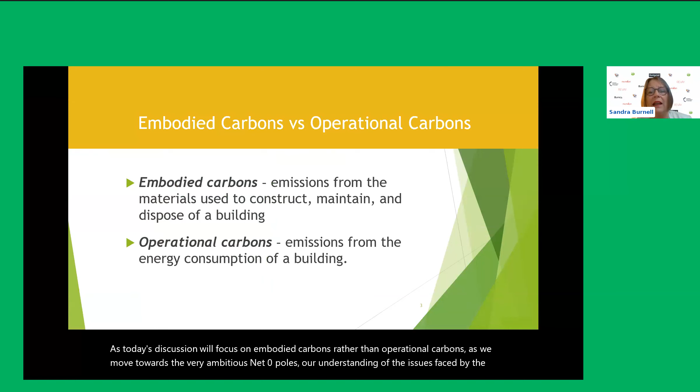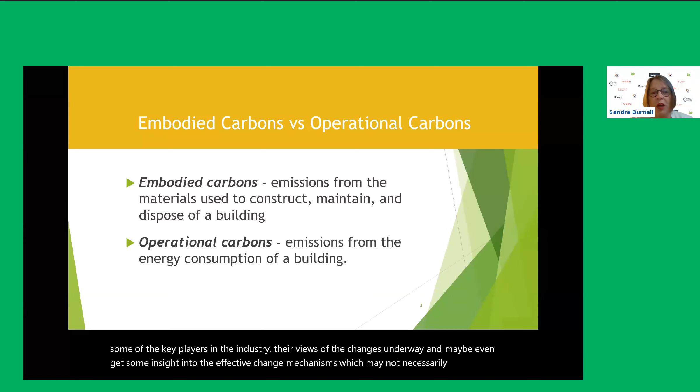Today's discussion will focus on embodied carbon rather than operational carbon. As we move towards the very ambitious net zero goal, our understanding of the issues faced by the construction industry at large continues to expand. Today's panelists will start by each providing a brief snapshot of their role in the movement towards reduced embodied emissions. We know that things need to change, but we're still not quite sure what all these things are. It's our hope that by the end of today's presentation, you'll have a better understanding of some of the key players in the industry, their views of the changes underway, and maybe even get some insight into effective change mechanisms, which may not necessarily result in additional project costs if managed effectively from the outset.

Our first speaker is Kailey Sutton from McMillan. She practices in infrastructure, municipal, and land use planning law, advising on the development of projects, bylaw and regulatory compliance issues, and building code matters. She also obtains front-end approvals and permitting, as well as drafting and negotiating complex agreements.

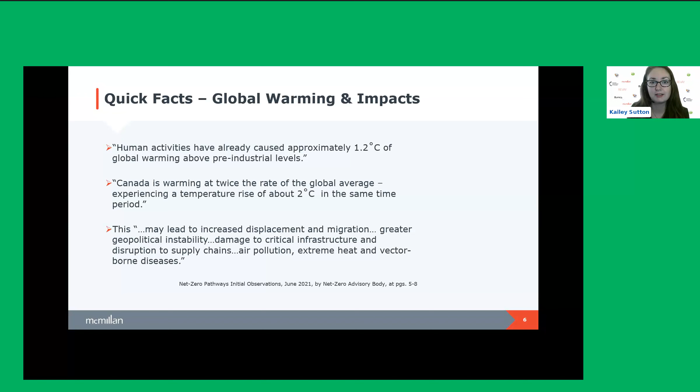Human activities have already caused a 1.2 degree change of global warming above pre-industrial levels. Canada is warming at twice the rate of the global average, and this might lead to increased displacement and migration, greater geopolitical instability, damage to critical infrastructure, and disruption to supply chains, air pollution, extreme heat, and vector-borne diseases. Two years ago, yeah, and I think we're seeing those supply chain issues, vector-borne diseases, air pollution, extreme heat - all of these things are happening and impacting everything, including the infrastructure and construction industry.

More facts, Canada-based: Canada's overall emissions growth over the 1990 to 2021 period was driven by increased emissions from oil and gas, as well as the transport sector. The decrease experienced in some of this was due to the electricity and heavy industry sectors - so either better electrification or change in those industry sectors.

Canada's homes and buildings account for 13% of national GHG emissions, so we have something to do with this. But okay, we've identified some foundational issues.

One of the other early issues a lot of us are experiencing right now is inconsistency with definitions when we're talking about greenhouse gases, net zero, and so on. There's also inconsistency with respect to formulas - are we talking targets? Are we talking legislation? So I thought I'd put up a few definitions to get us on the same page for this discussion. Net zero emissions is the anthropogenic, meaning human generated, emissions of greenhouse gases into the atmosphere, where they're being balanced by anthropogenic removals of greenhouse gases from the atmosphere over a specific period.

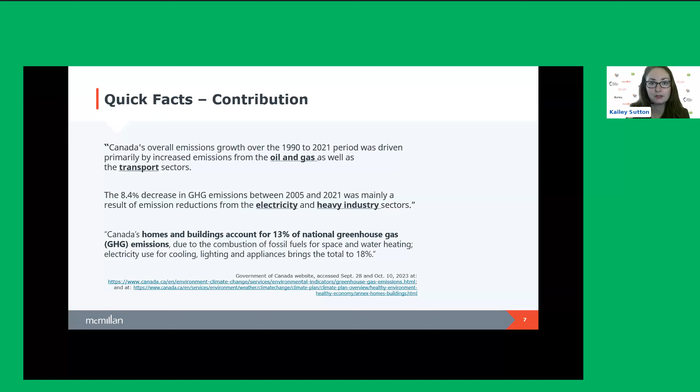So we're at a net of zero. And greenhouse gases - you know, I noticed that there's different definitions of what that can include too. Typically these are the greenhouse gases people are referring to: carbon dioxide, methane, nitrous oxide, and so on. So net zero doesn't mean no emissions, it means we're balancing them out. Unsurprisingly, there's inconsistency among definitions and formulas.

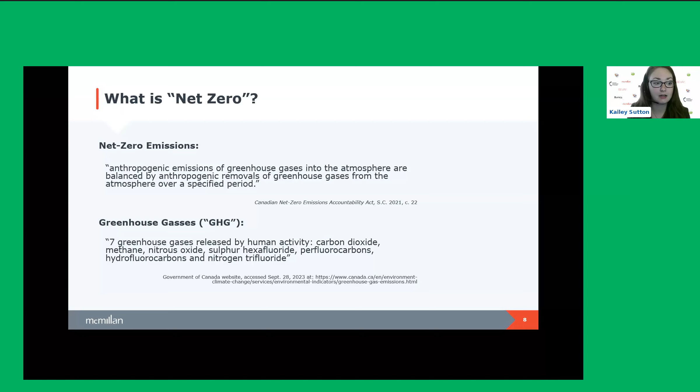Sandra, if we can go to the next slide please. All right, so we have these high level issues. But as I mentioned, this is a big conversation, and where to start with the regulatory regime...

It's a multi-dimensional question, and of course, as the lawyer, I'm saying, well, it depends. And what does it depend on? Well, a number of factors. Which regime applies to you? What are the rules? Well, it depends. What level of government are we talking about - federal, municipal, provincial?

What's the geographic region that you're located in? Because as we'll discuss later on, depending on what province you're in, depending on the nature of your project, it can change by your region. What type of infrastructure are we talking about? Infrastructure is not just one type of construction - we have transit, we have buildings, we have utilities.

The stage and process - are we considering how to construct? Are we deconstructing something? Are we talking about operating and maintaining? The level of formality - are we thinking it's an industry objective, or are we talking about a piece of legislation that I will be non-compliant with if I don't do these things? Also, what parties are involved - is this a procurement between a government body and a private party, or is this simply between two private parties?

So it is a big question and a big conversation, and I can't get through all of it today, but I will try and touch on some of these so you have an idea. Next slide please, Sandra.

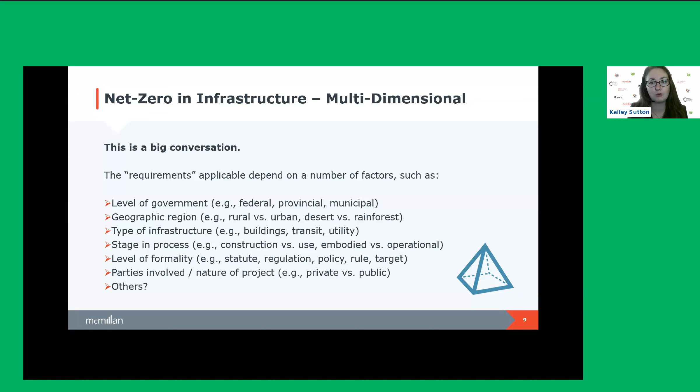So for example, depending on the stage of the process, as I mentioned and Sandra touched on this a bit when we were starting, embodied carbon would be carbon emissions associated with materials and construction processes throughout the whole life cycle of that building or infrastructure. Whereas operational carbon is the emissions associated with energy used to operate the building or in the operation of infrastructure. And then end of life carbon - these are the emissions associated with deconstruction, demolition, transport from site, waste processing, disposal phases, and so on. These are only some of the types of sources of carbon.

Thinking of others - what type of transit or transportation are you using to get your goods? Are we shipping? Are we using rail? Are we using vehicle-based transport? So it depends on what we're using to get you to your site. A lot of factors coming in here.

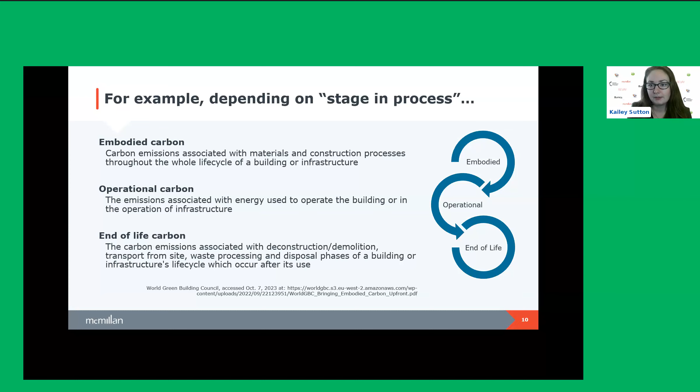For example, like I said, if we're talking about procurement between two private parties, the rules will be different than if it's between a government body and a private party. So let's look at this from the federal perspective first. Sandra, slides please.

So let's go high level again. As you are all probably aware, Canada is a signatory to the Paris Agreement, an international treaty on climate change, adopted by 196 parties at the UN Climate Change Conference in 2015.

Canada went one step further with a number of other countries and made a commitment for a certain amount of reductions to net zero emissions by 2050. The federal government has therefore enacted certain legislation as of 2021 to this end. But note that legislation, being the Canadian Net Zero Emissions Accountability Act, really only puts in place requirements for the ministers, so for the government itself to comply with, largely being monitoring and reporting.

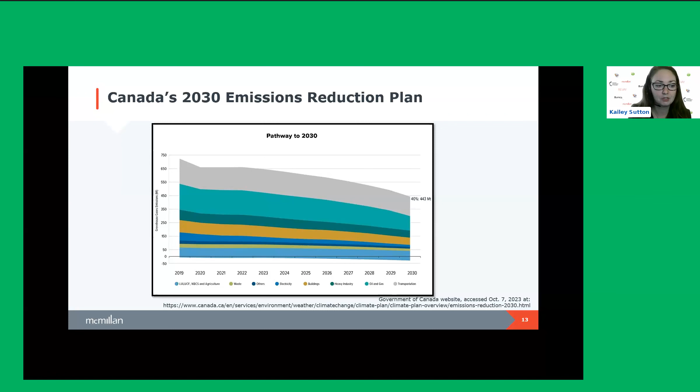So, for example, like the Canada Greener Homes Loan Program, additional investment, expanding the low carbon economy fund, additional funding for zero emission vehicles, and working with provinces and utilities to establish a pan-Canadian grid council. So it's all part of the government's plan. Good. Next slide, please.

Some of you may know, however, legislative powers in Canada are divided between federal and provincial, where the federal is generally in charge of environmental matters. The province is generally in charge of civil and land use matters, including construction and design. So most of these policies and regulations are going to come in here as impacting most people, I imagine, on this call.

And so the feds have, however, brought in a net zero energy ready model that was proposed in 2018 by the government. It's evolved since, and it's become part of this National Energy Code of Canada for buildings. So this was developed as part of a commitment for improving energy efficiency of Canadian buildings, and it applies to large buildings and sets out technical requirements.

But as I mentioned, this is the province's purview. So the federal government has had a goal of having the provinces adopt this. The provinces largely, in some way or another, have adopted some or all of this building code, and they've entered into a harmonization agreement so that between provinces, we're starting to have similar requirements. Ontario's adoption of the NECB is through amendments to our Ontario Building Code. And so if you are building in Ontario, you're going to be subject to the Ontario Building Code, subject to a few exceptions. And so the building code...

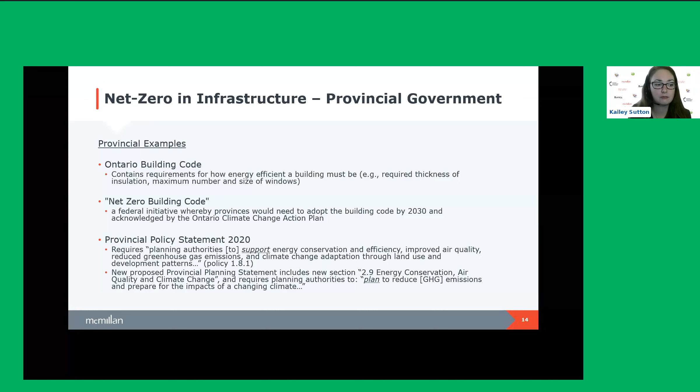Sandra, next slide, please. The province, however, delegates a number of its building code matters to municipalities.

And so you'll likely run into a lot of this at the municipal stage. You'll be aware that if you're building, you're required to meet a number of items considered applicable law under the Building Code Act to obtain building permits. One of those is, for example, site plan approval. Site plan approval doesn't apply to all jurisdictions in Ontario, but where it does apply, you'll be subject to approval conditions that need to be met.

Those approval conditions generally need to align with the planning instruments above it, including zoning bylaw, official plan, and PPS. And so this is how the province's mandates start to come down into what the municipality is regulating.

In addition, municipalities have been putting in place their own standards. So there's the Toronto Green Standard, for example, that many might be aware of. It's currently on version 4. And as they've said on their own website, it is a critical tool in implementing their official plan policies.

Mississauga, for example, has the Green Development Standards, which is currently being updated, and I know it's open for industry consultation. And Ottawa, for example, has the High Performance Development Standards, and it notes on its website that it's a collection of voluntary and required standards that raise the performance.

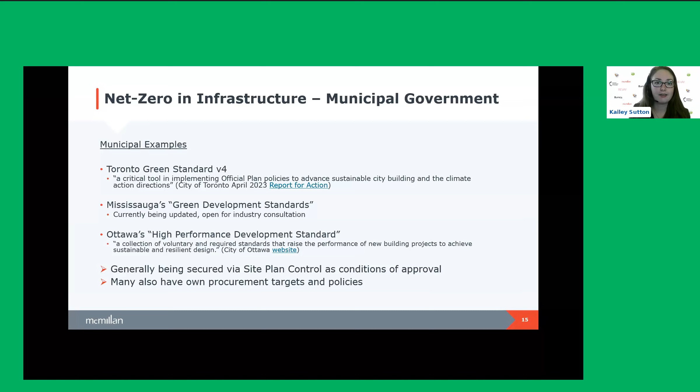I do note, like the federal government, the province and many municipalities also have their own procurement policies. So if you're entering into an agreement with the municipality, you'll likely be subject to additional standards and policies. But again, that's something that they as owner are enforcing, not necessarily because it's law.

Next slide please, Sandra. My last slide, but I wanted to highlight some of these challenges, as I think you may have pulled out yourselves through what I was saying. What I started with: there's inconsistent definitions, targets, standards, means of measurement, and so on. And so the industry, I think, is trying to come together to align, because without consistency even in our starting definitions, how do we know how and when we get to these end targets?

Many of the requirements apply to public procurement only as actual legal requirements. And even then, not necessarily law. So what are we doing that is in place that can actually enforce some of these requirements?

Many are limited in scope. So the Standard on Embodied Carbon in Construction currently only covers ready mix concrete. So we need to figure out ways to expand this and make it apply more broadly.

And most include reporting requirements, but not penalties for missing a target. For example, the Canadian Net Zero Emissions Accountability Act even says that the instruments included in that act are actually not statutory instruments. So again, they're more like guidelines.

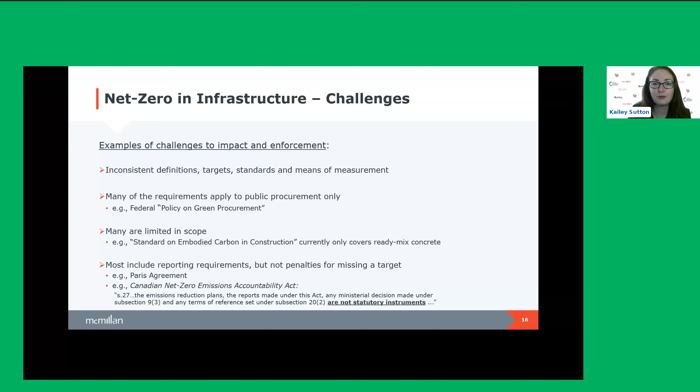So not to end on some note of concern, but more so to say, at the moment we've got a lot going on in terms of regulatory regime. I think the industry needs, and is doing a really good job of trying to learn more about it, and we've got some challenges to overcome. Thank you to the TCA for hosting this session to try to help us overcome some of these challenges. So I will end on this note and look forward to hearing my co-panelists speak about the technical parts related to this industry. Please reach out to me if you have any lingering questions or would like to discuss what might be applicable to your project.

Thank you, Kailey. Definitely a lot to take in here. And most importantly now, we know who to contact when we start digging into all these regulatory requirements.

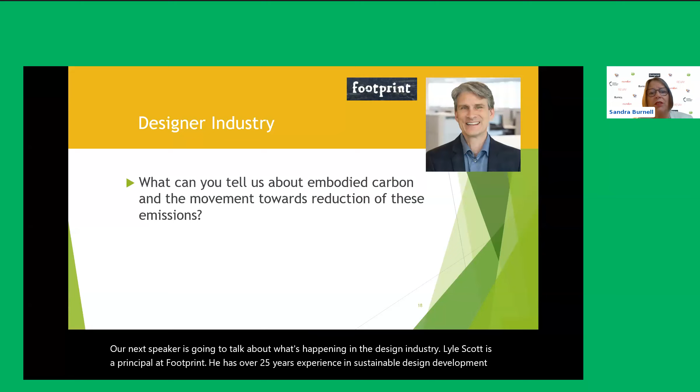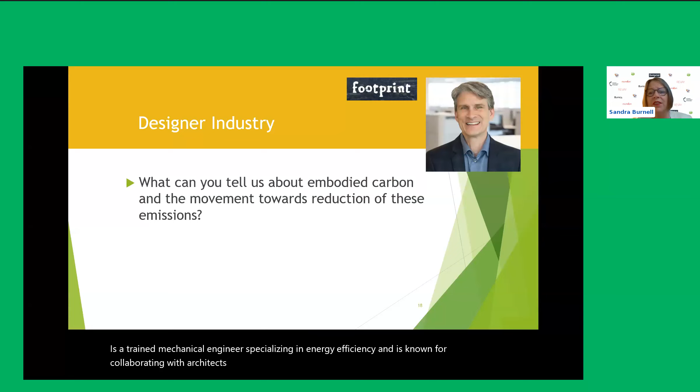Our next speaker is going to talk about what's happening in the design industry. Lyle Scott is a principal at Footprint. He has over 25 years experience in sustainable design, development, and operations. He's a trained mechanical engineer specializing in energy efficiency, and is known for collaborating with architects, engineers, and developers to create the most appropriate sustainability solution.

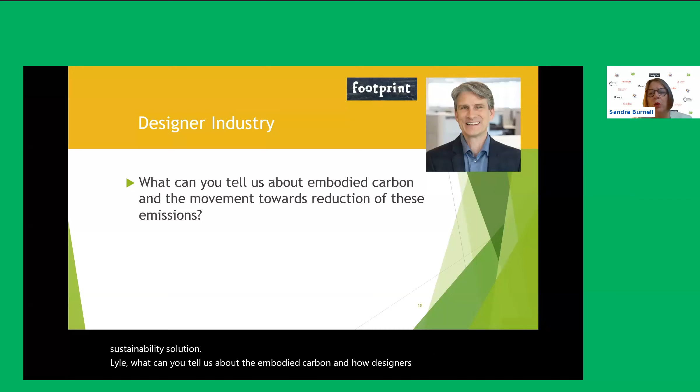Lyle, what can you tell us about embodied carbon and how designers are moving towards the reduction of these emissions?

Well, one of the interesting places to start is that I'd say there aren't many in the industry who really understand what embodied carbon is. It's a term that's new to most of us, and due to the regulatory changes we're seeing, I feel that a lot of us are going to need to become experts in it quickly.

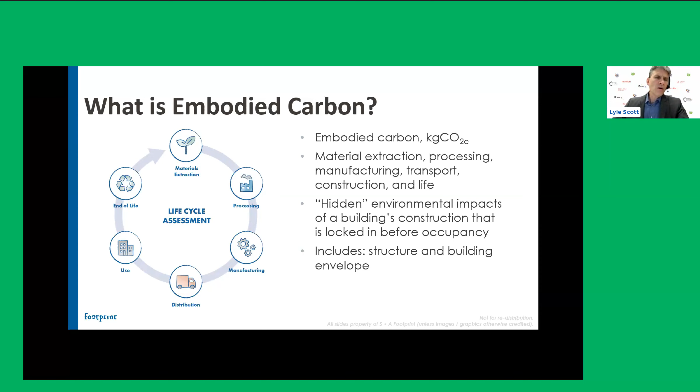Each stage along the way has some embodied emissions. We're using equipment that's burning natural gas or diesel fuel or other fuels that are having an impact on our planet. So on to the next slide, you'll see an interesting little pie chart.

I've been involved in this industry for literally decades, and we've always focused on what happens with operations - our gas bill, our electricity bill - and we've focused on reducing the energy associated with operations of the building, our heating and cooling and lighting, etc. And we kind of haven't even thought about the energy that's involved in building materials and construction.

There are different stats, but when we actually take a look at it, it's a big deal. And up until this point, all of our efforts have really been focused on making our buildings more energy efficient without looking at the impact on the materials we're selecting to go into our building.

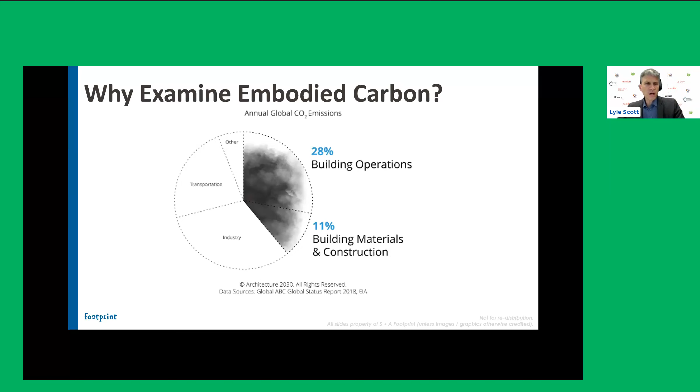So on to the next slide. As we make our buildings more and more efficient, it's actually projected that the embodied carbon impacts of a construction project will basically be equal to the operational impact of that building over the 60-year life of that building.

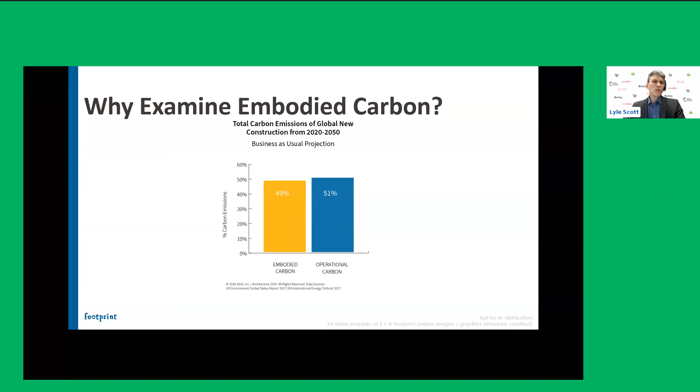So what do we do? On to the next slide - we'll do something which we call a life cycle assessment. A life cycle assessment quantifies the embodied carbon of a particular design, and predicts what that embodied carbon is going to be over the life of the building. It looks at the different stages: the product stage, the construction phase, the use stage, and the end of life stage.

This is something that's most useful, I think, at the early design stages when you have a lot of different design options on the table, when you're considering different materials, different potentially massing or other options that you may have at the earlier stages. As you get further into the design, you could start to refine some of your design decisions, and this life cycle assessment will get a little more accurate.

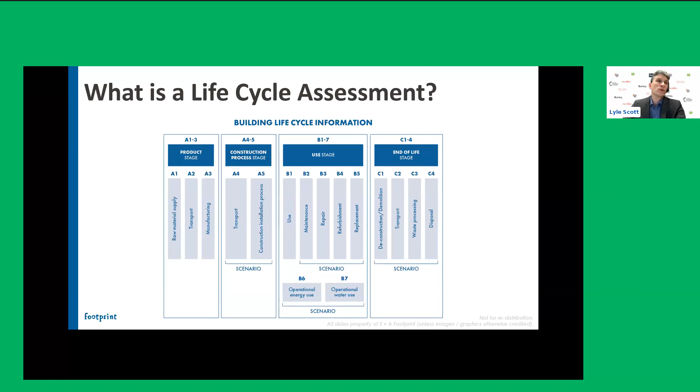On to the next slide. Life cycle assessments have only really been commonly discussed in our industry since LEED version 4 came out. That was a handful of years ago. And it's been, I'd say, niche - there's been a limited level of knowledge. That level of knowledge has increased with the release of the Canada Green Building Council Zero Carbon Building Standard.

Both of these standards are voluntary, so it really is up to those who want to be known as an industry leader in sustainability to latch onto one of these standards - that's most common. There are other standards out there, but these are voluntary options. On to the next slide.

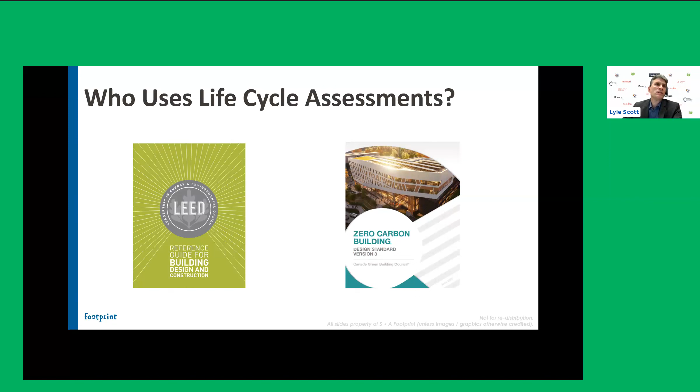Kailey mentioned that the Toronto Green Standard is looking at embodied carbon, and they came out with some research. This research was done by the Toronto Atmospheric Fund, a study done with the University of Toronto. They analyzed a bunch of buildings - on the left we have Part 9 residential buildings, single-family homes; large residential buildings in the next column; and then commercial buildings and other building types in the last column.

Really what it's showing is how the best building performed - a lower number here is best, a higher number is more embodied carbon. It's showing how the best buildings performed and how the worst buildings performed, and the average is the little square in the middle. So the average embodied carbon was 191 for a small single-family home, and 435 for a large multi-residential building - that's kilograms of CO2 equivalent emissions per square meter. On to the next slide.

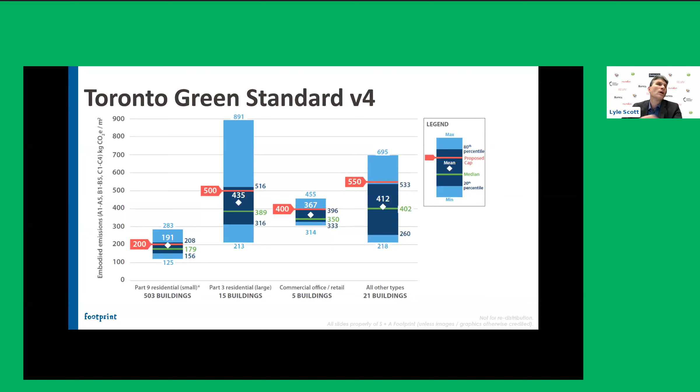Earlier this year, City Council approved a change to the Toronto Green Standard. It changed the Tier 2 and above embodied carbon requirements. The Toronto Green Standard Tier 1 is mandatory, while Tier 2 and Tier 3 are voluntary. So the city did not make any changes at this point in time that impact mandatory requirements.

They impacted voluntary requirements, setting a target of 250 kilograms of equivalent CO2 per square meter for a single family home. That's about 24% worse than the average in that University of Toronto study. They set a target of 350 for high-rise multi-residential and non-residential, which is 24% better than the average in that U of T study.

They set a Tier 3 requirement for mid-rise and high-rise residential of 250. That's 74% better than the average building in that U of T study.

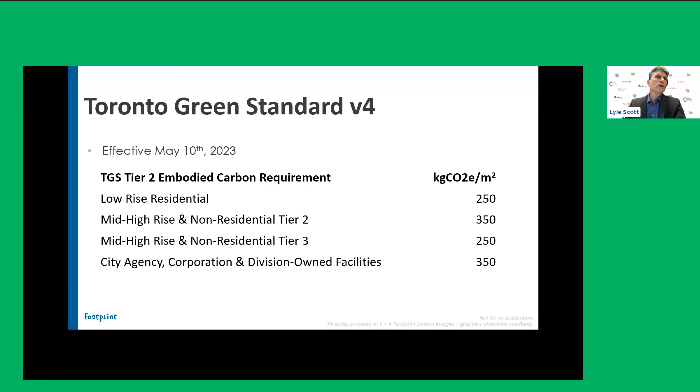On to the next slide. These are all voluntary requirements, right? They're Tier 2 and Tier 3. So why does it matter? Well, the Toronto Green Standard, one of the things they did was in 2017 there was a real change to version 3, and what they did back then is they said, here's what's going to happen for the next versions of the Toronto Green Standard.

We're telling you that the Tier 2 is going to become Tier 1 in the next version, and they've given us the dates for this. Our current version is version 4, in place since 2022. There's going to be a new version in 2025 and a new version in 2028. It is anticipated that the version 4 Tier 2 voluntary requirements in place right now will become mandatory in 2025, and similarly the Tier 3 version 4 current requirements will become mandatory in 2028.

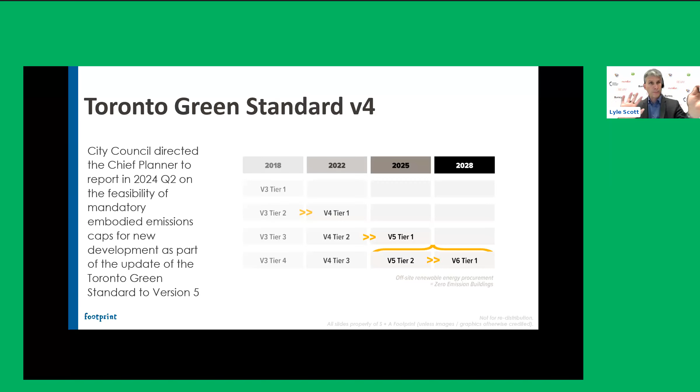That's my speculation, but it's backed up by a statement that came out in that same city council ruling that happened on May 10th of 2023. City council directed the chief planner to report in Q2 of 2024 on the feasibility of mandatory embodied emission caps for new development as part of the update to the Toronto Green Standard to version 5. So what I'm saying is that's notice that effective June 1st, 2025, we can anticipate mandatory targets in the city of Toronto. It's not ruled on yet, but that's the guidance we're getting. On to the next slide.

You're going to see the same thing happening in many, many municipalities. This, for example, is the draft Mississauga Green Development Standards. The targets are very similar, again with Tier 2 and Tier 3, though their years are slightly different. They're suggesting Tier 2 will have a mandatory target in 2027 and increase it again in 2030. We also understand that the National Energy Code for Buildings is going to have a 2025 date for embodied carbon. Again, it's a national energy code, so it'll only become relevant when it's adopted by the provinces into the Ontario Building Code and other provincial codes.

On to the next slide. Lots we could do. Most important thing is, as an industry, we have to start educating ourselves now. We can't wait, we really cannot wait. There are a lot of things, and not all of them increase cost. One of the big things I've seen is a reduction of below grade structure, which can significantly reduce costs, with obvious impacts on parking and other things. There are material substitutions we can make, but most importantly, I think innovation will be necessary, and you will need to start working with your suppliers and talking to them about embodied carbon.

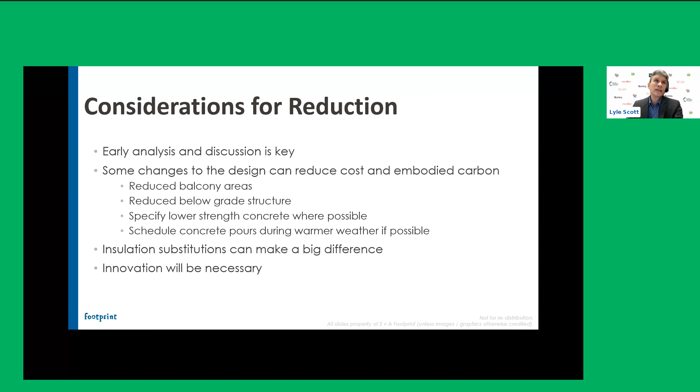Next slide, big way to close. So many of us are still thinking, oh, we're going to do what we did last year or the year before, just updating it. We really, really, really have to take a different approach.

I have not seen the industry change at such a rapid pace at any point in my career as what's happening now. Sandra, back to you.

Thank you, Lyle, that was fabulous. What we're leading into, I think, is the most important thing: making people aware. We've got to know what's coming, and we need to know what everybody's doing out there and how we can fit into it or take advantage of all the learning that's taking place.

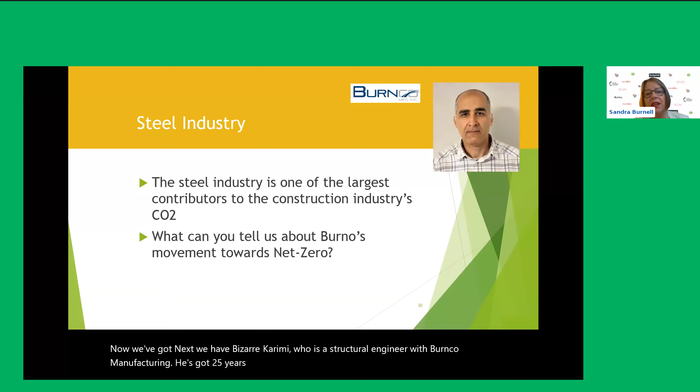Now next we have Behzad Karimi, who is a structural engineer with Burno Manufacturing. He's got 25 years experience in the steel industry. He has his master's degree in structures and is a structural engineer and project manager with Burno Manufacturing.

Recognizing that steel and cement account for 14% of global CO2 emissions, and 47% of the construction industry's emissions, steel manufacturers and installers have the largest opportunity for improvement. Can you tell us how Burno is moving forward towards the reduction of carbon emissions? Sure.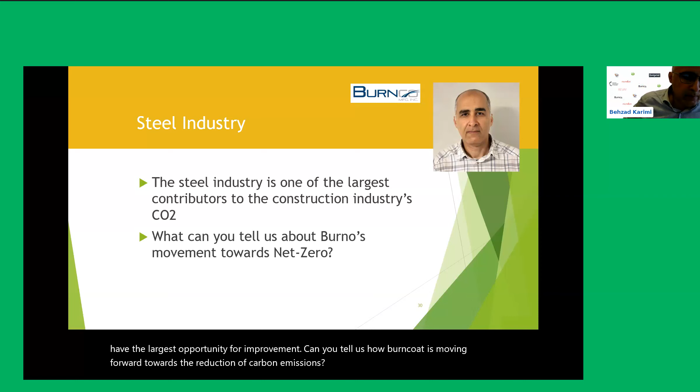As you know, the Government of Canada has implemented a standard on embodied carbon in construction. Currently, steel construction product is not included in that standard. A steel product should be considered as mill products or final product used in construction.

Steel manufacturing produces more CO2 than any other heavy industry, comprising around 8% of total global emissions. Efforts are in place to move steel production away from coal-fired furnaces to ones powered by electricity or hydrogen. The steel supply chain has potential to reduce emissions by replacing fossil fuels with low or no carbon options, switching to renewable electricity, electrifying vehicle fleets, and increasing the usage of recycled material.

When I'm talking about fleet, imagine we have a project like 5,000 tons of steel. Imagine transportation for this steel from mill to final product - how much fuel has to be consumed for just this one project. We have a couple of these projects in our facility, and the steel industry is a big industry in Canada and the US, so you can imagine how they scale up the steel.

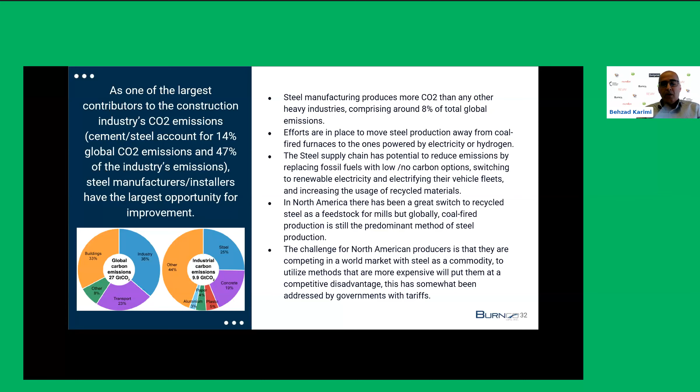Next slide, please. So, how are steel manufacturers currently expanding and planning for the future? There are a couple of aspects.

One of the major ones is design. Many sophisticated 3D design softwares have been developed which assist to optimize the structural design, leading to less steel than previous software or manual design methods. Less steel, less CO2 emission.

Welding fumes are one of the origins of CO2 in the steel industry. Optimizing the joint design to use less welding size, or the minimum possible welding joint, is one of the solutions to reduce CO2 emissions.

This is something we implemented in our plant here. Steel is a recyclable material, so there is the ability to reuse the material multiple times. This is one of the big advantages of steel, if we can think about reusing steel in our future projects. Next slide, please.

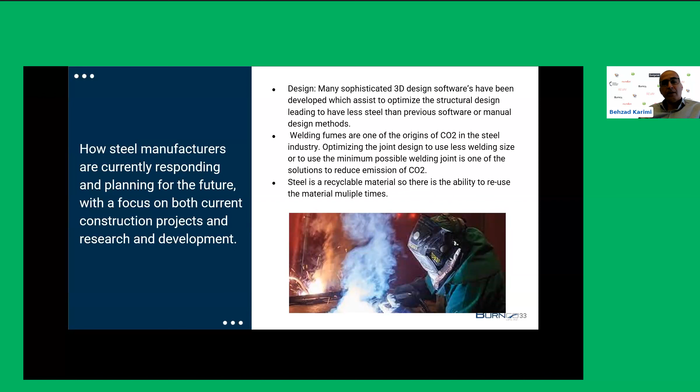So, use low carbon steel. These days, the use of low carbon steels has increased compared to the past. That's good news for the steel industry and for reducing CO2 from steel.

Purchase the steel from local mills, like USA or Canada, because as I explained, transportation for steel is a big item contributing to CO2 emissions. So if we reduce the transportation, we reduce carbon being transferred everywhere.

Burnco and its parent company have been developing robotic welding machines to replace traditional welding machines, as well as automated plasma cutting, which reduces production time and waste in the welding process. We also concentrate on local projects to avoid long transportation of finished steel products to the site, so currently we're focusing on more local projects in Ontario rather than projects in Alberta or eastern Canada.

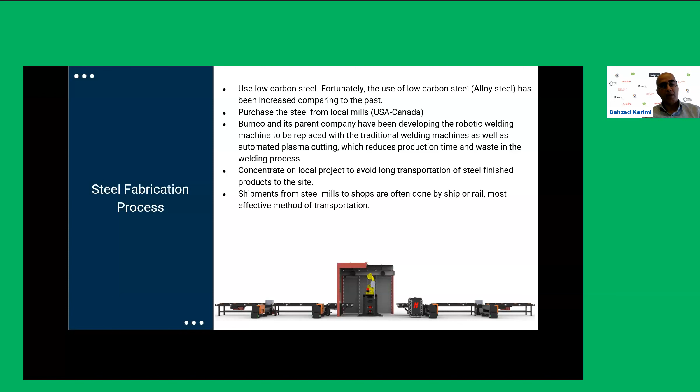In our fabrication process, we're utilizing modern nesting software, which minimizes the scrap weight of the steel in the project. We utilize mill steel at mill length and optimize the software to maximize yield and minimize scrap, so when we have a project, we try to have the steel in a size which has less scrap. Previously we had about 5 to 6% scrap on the steel. Right now, with these measures, we try to reach 1% scrap.

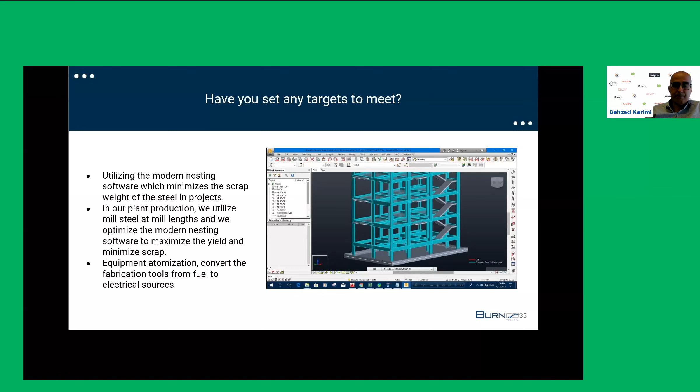Equipment automation and converting the fabrication tools from fuel to electrical sources is one of the measures we're doing in our plants.

So what are the biggest hurdles faced by the steel industry? That's an important question. Producing green steel is an expensive process, and the industry needs to scale up rapidly to hit net zero targets. Today, 75% of the steel worldwide is still largely made in coal-fired blast furnaces. North American and European mills are generally converting to scrap and electrical furnaces at high cost. At the mill level, these technologies are expensive and can be cost prohibitive, making mills less competitive than those from other jurisdictions. It's a difficult balance for mills to scale up to hit net zero targets while remaining competitive in the market.

At the manufacturing or fabrication level, we are in a competitive bid. To be successful, we must source the cheapest available steel. On larger projects, fortunately, there are North American provisions to give local mills an advantage, but more of this is needed at the government or provincial level. There have been successful trade actions against dumping from jurisdictions such as China and other countries for mill steel and fabricated steel. We need more of these actions.

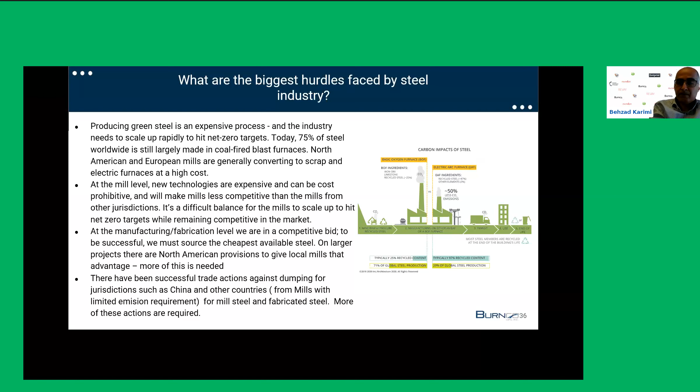What help do we need? Steel has a large role to play in lowering future emissions because of its ability to be recycled, and it is sustainable in the long run. Steel in the long term can be remediated, reinforced, and recoated to have a very long lifespan.

So we should have more steel in the design of the building, I'm talking about building with a steel design. Life expectancy and sustainability of steel compared to other materials in the infrastructure system need to be considered.

The steel manufacturer can achieve carbon neutrality if governments implement the right policies in the next five years. According to the International Energy Agency, in a new report, the IEA says economies need to recognize the use of interim technologies that substantially reduce emissions even if they aren't considered zero emissions. We don't need to say zero emissions since it's not mandatory now, but we have to have a plan, an interim plan, to reduce it substantially.

At the government level, more financial aid or incentive programs are necessary to upgrade the technology. And the last item is tariffs on dirty steel, blast furnaces versus electric arc production.

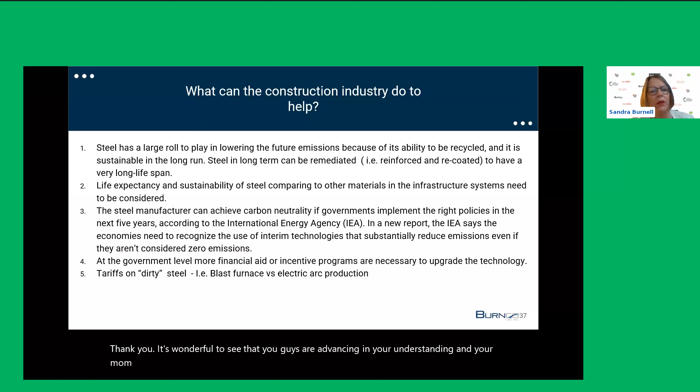It's wonderful to see that you guys are advancing in your understanding and your movement towards what we can do in this industry. Now, we'd also have a speaker here for the cement industry.

Sarah Petrevan is the Vice President of Sustainability for the Cement Association of Canada. She's the 2018 Clean 50 Emerging Leader Award recipient. With her expertise in industrial decarbonization, she advocates for policy change. She's testified before legislative committees and provides regular commentary for media. She also provides advice on topics such as carbon accounting, procurement, and the scale-up of clean technology.

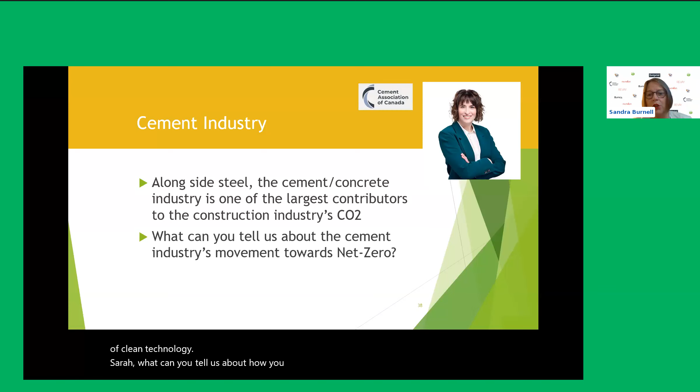Sarah, what can you tell us about how your industry is moving towards the reduction of carbon emissions? Sure, thanks Sandra. I really like how Kyle set up the conversation on embodied carbon in construction, but I think we have to think about concrete: what happens to it before it gets to a construction site? What's its carbon footprint and how do we lower it? This was something the Cement Association of Canada grappled with, along with many of our allies in the concrete industry.

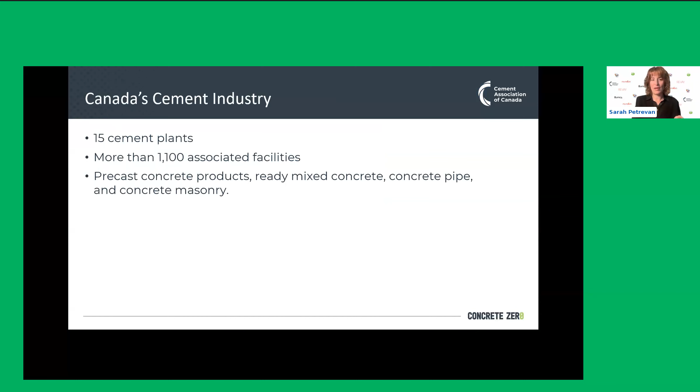Last May we created this action plan to net zero. Canada's cement industry is pretty vast. We have 15 cement plants across the country with more than 1,100 associated facilities, manufacturing everything from precast concrete products, ready mix, concrete pipe, concrete masonry, etc.

And so we developed ourselves our action plan to net zero. This outlines the steps that Canada's cement and concrete sector will take to achieve our net zero carbon goals. It featured contributions from members of the cement and concrete industry across the country, and we also had the report peer-reviewed by other allies in the industry.

Academics and environmental non-governmental organizations helped test some of our assumptions and the data we provided. We received a lot of feedback on the report, namely that this is one of the most transparent reports ever produced by a heavy industry association in Canada.

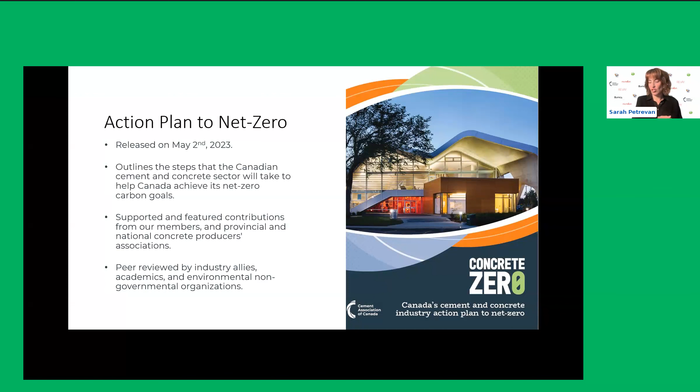Next slide. Maybe just a comment on the benchmarking data related to the federal government's embodied carbon in construction. The reason why ready-mix concrete is the only material covered is because, as far as I know, we're the only industry that has actually provided benchmarking data.

Because, of course, what is lower carbon concrete? Lower carbon compared to what? So it's always really important in regulatory approaches, in standards, in anything, that you have a baseline so that you know what lower actually means.

So let me talk a little bit about our targets. We modeled two different types of targets. We did one against a baseline of 2020 emissions, and in keeping with the Global Cement and Concrete Association's Concrete Future Net Zero report, we mirrored their 2020 baseline.

But we also looked at a business-as-usual scenario in which we planned for a modest increase in the use of concrete, because obviously we have to plan for market conditions, and it's not actually achieving net zero if you don't take market conditions into account.

Maybe one other quick point around our net zero action plan is that we really tried to get to true net zero, which means that we didn't account for purchasing of offsets, nor did we account for avoided emissions in our plan. So this is what we call a true net zero action plan.

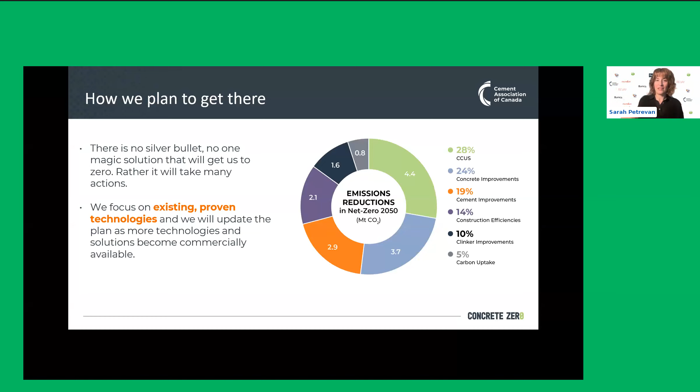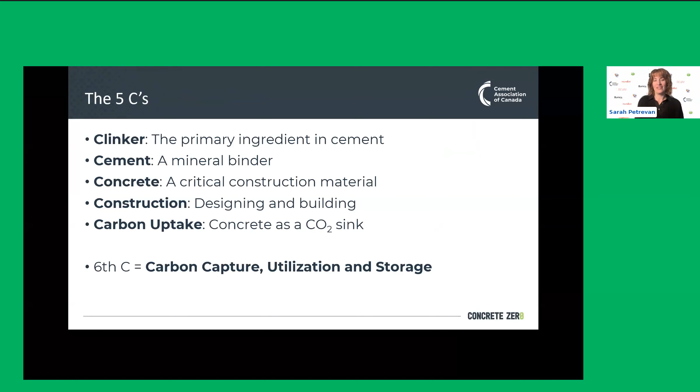And so we looked at what we call the 5 C's: clinker, cement, concrete, construction, carbon uptake. And then I always like to talk about this kind of sleeper 6th C, which is carbon capture, utilization, and storage. Next slide. So clinker, for those of you that may not know, this is the most GHG intensive component of cement.

But it is the key ingredient that gives cement its binding properties, and it is the kilning process. So it's not only the GHG emissions from the fuel source combustion, but also there are process emissions as a result of a chemical reaction. We call these emissions the chemical fact of life.

Our main emissions reductions in this area are about replacing fossil fuels that we use in the kilning process, substituting clinker—meaning we over time are able to lower the ratio of clinker used in cement through the use of something called supplementary cementitious materials—and, of course, deploying carbon capture along with either utilization or storage, depending on the jurisdiction you're in. We also acknowledge that thermal efficiency, decarbonated raw materials, and novel clinker chemistries are going to play a role in this in the future. We're just not sure what those are.

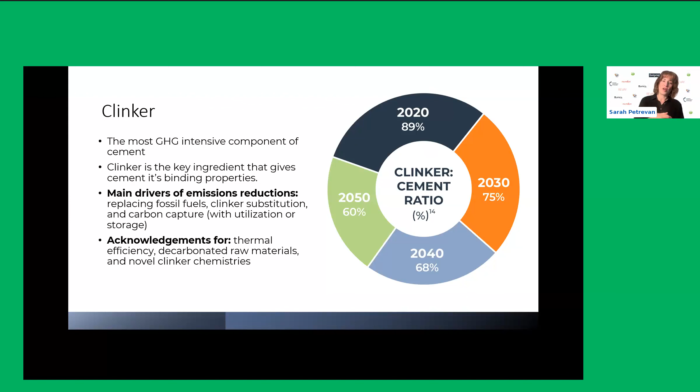Next. Then we go and we look at cement. Obviously the most energy intensive phase of the concrete value chain is at the cement plant, and so our main drivers of emissions reductions are really at looking at new and different cement blends.

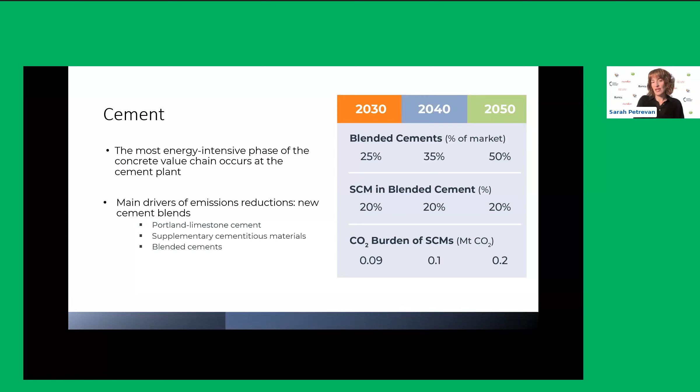So I talked about the increased use of supplementary cementitious materials, the shift—the 100% shift—to Portland limestone cement. Many of our members across the country have plants that don't produce anything but, and then of course the increasing emergence of blended cements. Next slide.

Concrete is the second most used material in the world after water. We like to say that a net zero future will both literally and figuratively rest on concrete because of its ubiquitous nature. It's also an incredibly climate resilient material and can support, in infrastructure for example, a reduction in operational carbon due to its heat retention or cooling properties, depending on how it's used.

So really, our emissions reductions on the concrete side is going to look at optimizing the concrete mix for the application. So admixtures, also perhaps the incorporation of recycled concrete aggregate where allowed. But also, some things that Lyle mentioned, right? Optimized concrete design to ensure not over-specifying strength and durability requirements. And then, of course, powering how we produce concrete with clean energy.

So it's clean electricity at a ready mix facility, and also a shift over time to zero emission vehicles. So maybe one day you will see a concrete mixer rolling down the street that's powered by hydrogen or electricity or something else.

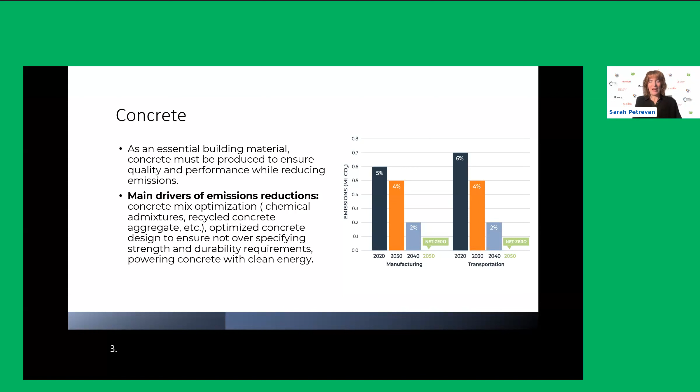Some people call them cement mixers. They're not cement mixers, they're concrete mixers. Everybody on this call knows this, but my daughter has these books and she's like, it's a cement mixer. I'm like, no, child.

Okay, so construction. As Lyle suggested, there are big opportunities to reduce emissions through design and construction. This is obviously outside of direct control of our industry, and so it requires partnership as well as continued education and awareness and working directly with the construction industry, which is why I'm so glad you guys asked me to present today.

So in this area, our main drivers of emissions reductions look at material efficiency - column spacing, voided slabs, etc. And then also waste reduction: don't order more concrete than you need for a job. I think I saw a stat once that concrete can make up 70% of a job site but maybe only 3% of the budget. So just because it's less expensive, maybe don't order more than you need.

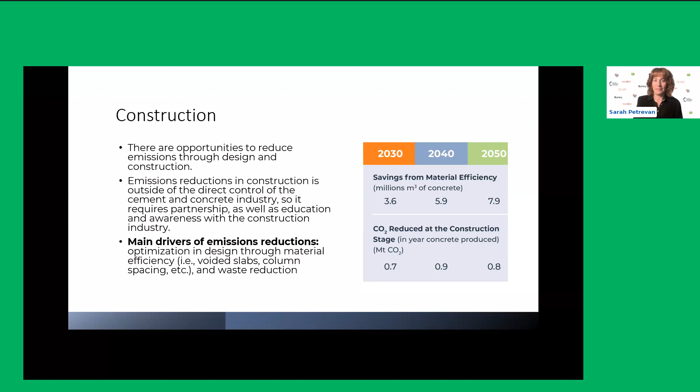Finally, there's this thing - concrete has this secret power. And I'm not a chemist, but here's the result: when you're creating clinker in the kiln, when you process the limestone, you get calcium oxide and CO2. Basically, the way to think of it is that once the cement is in concrete, at some point the calcium oxide wants its CO2 back. So there is a natural property that concrete can sequester CO2 from the atmosphere and permanently capture and store it within the concrete.

Now, how much of this actually happens on each project varies. We based our numbers on the most prevalent research study, which is out of Sweden, but there are a number of Canadian studies happening with infrastructure that look at drill core sampling to actually test how much carbon uptake we're getting in different infrastructure applications and weather conditions. Our ability to park emissions against carbon uptake is going to decrease towards 2050 because our process emissions are going to decrease, so there's not going to be as much calcium oxide that wants its CO2 back. That's just a very elementary way of explaining it.

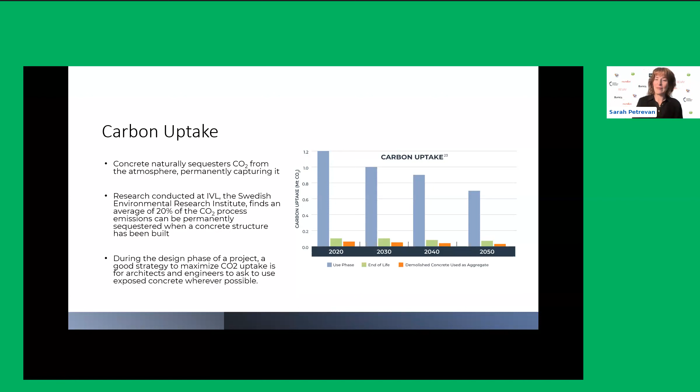And finally, I want to talk about CCUS, because it can be a controversial topic. But I want to make it clear that it is vital to cement and concrete's ability to reach net zero - we cannot reach net zero without it. Why? Because we have process emissions. Deploying CCS technology at full scale during manufacturing can eliminate all of our process emissions and maybe any small amounts of remaining combustion emissions, because our goal is to go to as close to 100% clean fuel source as we can. Today there is no other technology or process that can entirely eliminate process emissions. The cement industry in Canada is working on taking a leadership position - you may have heard that a couple of our members are looking at building carbon capture plants in Alberta.

One of them, in Edmonton, is being conceived right now, and all this information is in the public domain. If we are successful in building it, we'll have the world's first net zero cement without the use of offsets, and it will be the world's first full-scale carbon capture deployment at a cement plant. So we're pretty excited and very hopeful that it actually comes to fruition.

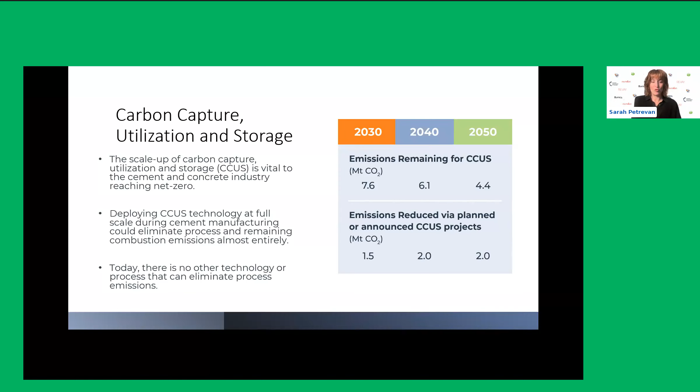Next slide. I want to talk a little bit, just very briefly, about what we call enabling measures. These are things that need to happen in the world, with government, in collaboration with the construction industry and the design community, to try to maximize concrete's potential to reach net zero.

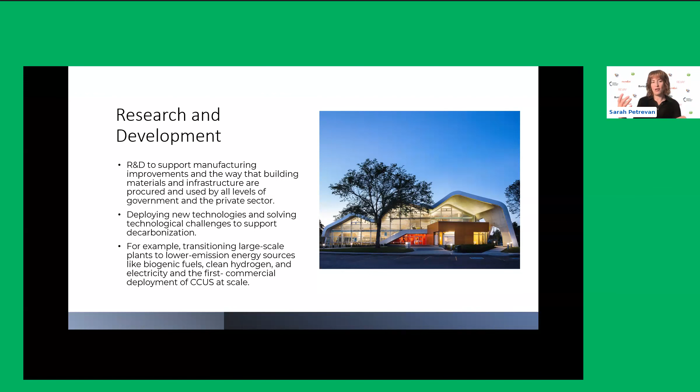Research and development is a big one, to support manufacturing improvements and the way materials and infrastructure are procured and used by all levels of government and the private sector. Obviously, testing and deploying technologies to help solve some of the technological challenges faced not only by the cement and concrete industry, but equally by steel or chemicals—transitioning these large energy intensive plants to lower emission energy sources like hydrogen, biogenic fuels, etc.

Next. Code standards and specifications—so important. Building practices are evolving and will continue to evolve to consider the impacts of climate change, but can also be used to drive made-in-Canada innovations for low carbon materials and approaches.

One of the things our industry is really interested in advocating for is something called performance-based standards, where you say: okay, I need concrete for this application, I'm pouring at this time of year, I need to meet X, Y, and Z requirements—what's the lowest carbon you can get me? Because there are so many factors that go into what you can do.

You can get a really, really low carbon sidewalk if you're pouring it in the summer—you could get really low carbon there. I'm building a bridge in wintertime, your options might be different. And then, of course...

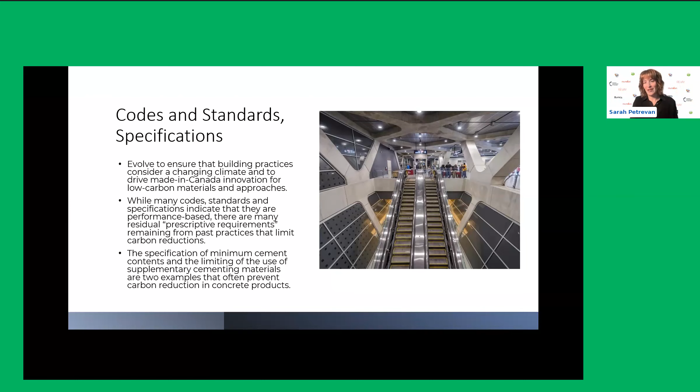Things like minimum cement content or limiting the use of SCMs are two examples that often prevent carbon reduction. I remember one of our engineers telling me they got a request from a proponent that said: okay, we would like 30% emissions reduction on this project, but you're only allowed to use 10% SCMs. That gets pretty challenging. Next slide.

Procurement, right? Procurement is a huge one for our industry, and actually for any of the building materials. Government policy that sets benchmarks and encourages market dissemination of lower carbon products is definitely a way public policy can be used to help drive change.

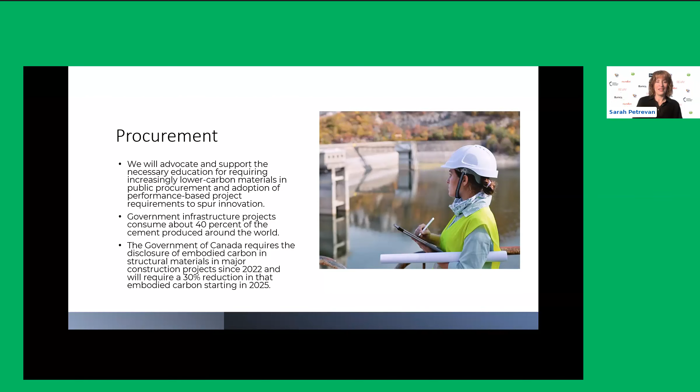And finally, just on quality data and carbon accounting: our industry has fully embraced regionally specific, industry-wide average EPDs—environmental product declarations—for both cement and concrete, as a way of quantifying and confirming our improvements on carbon reductions. Many of our facilities and individual concrete mixes also have EPDs. There is still significant work to do around the comparability of carbon data, particularly as it relates to other products, but we are definitely committed to doing it.

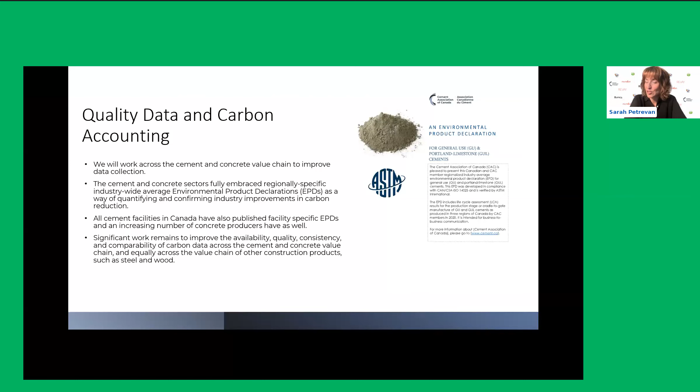And so with that, I will conclude.